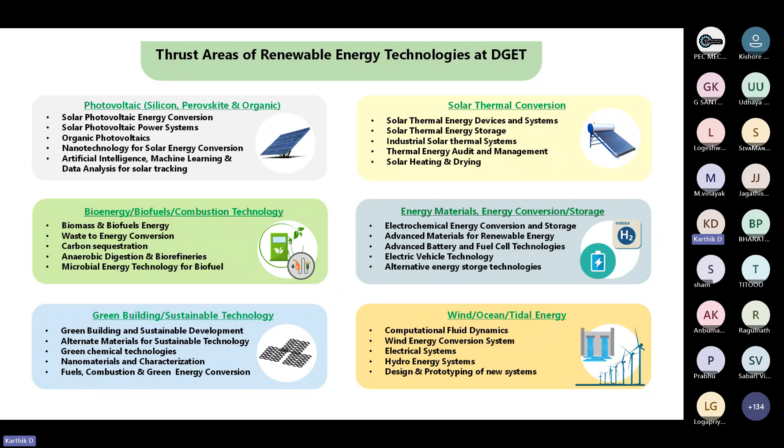So apart from that, now we are going to start a B.Tech program recently because of NEP. Everyone has to be focused on NEP-based programs. We are starting newly from this August B.Tech Energy Science and Technology. So that is of our department.

So now we have to go with the drone design and analysis. Why do we have to design the drone? What is the importance of designing drones? What are the applications? Any of you can give your opinion. Otherwise, I will just move forward.

In recent days, the importance of drone design has significantly increased. From toy to domestic applications, or for any events, drones are playing a highly vital role in shooting video and multiple things. And in Dubai and some other places, they started utilizing it for logistics management, carrying products from one part to another.

So recently, some one or two years back, our DRDO called for a project. That is about the development of drones having a high payload capacity. So what is high payload? Anyone? The payload basically depends upon the load carrying capacity of the particular drone design.

So it may have to carry food supply or logistics. Other than that, it can be useful as a spy camera. Additionally, it can carry weapons. So multiple usage, and it must be capable of carrying multiple loads and handling weather conditions. When you go to certain heights and certain climatic conditions, it has to withstand the climatic phenomena. Mostly we are traveling against the flow.

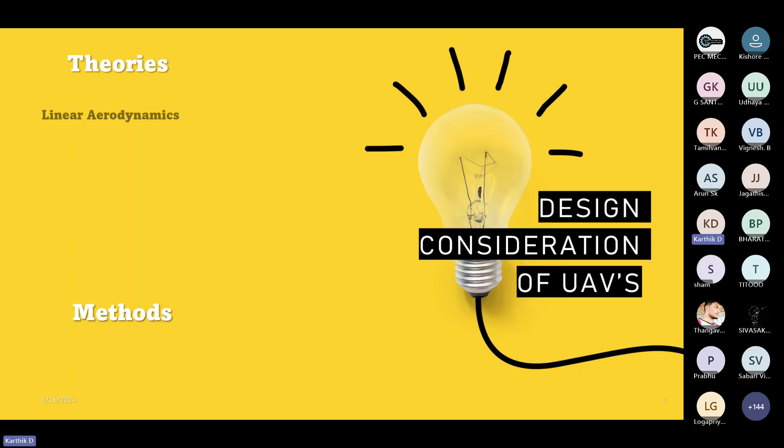So with respect to the end user, we will design a particular component or any product. So now we have theories and methods. So what are the theories and methods? When you design any drone, you have to think about linear aerodynamics, steady aerodynamics, aircraft trim, sustained turn, vortex lattice method, drag component buildup method, and computational fluid dynamics, CFD, and turbulence in CFD.

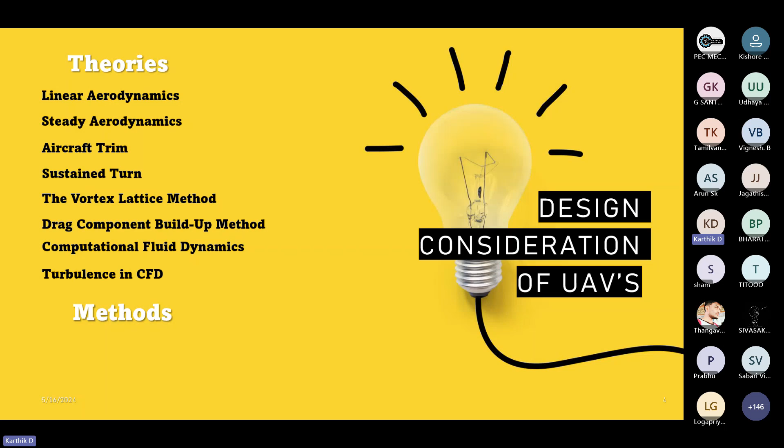Okay. So now when we go for methods, what will be there? There is a vortex lattice model or method. Okay, it will be like a model or method. Then computational fluid dynamics modeling and analysis. So why do we have to do this?

Earlier we utilized an experimental model, a prototype developed, then analyzed it in different wind tunnels. In wind tunnels, we focus on different aerodynamic profiles. It takes a lot of time, and you have to create multiple prototypes. If any particular dimension or anything has to be changed, we have to do it again and analyze it again.

So that is why the computational aspect is more prominent in recent years. It will be cost effective. It will be process effective. Finally you will get to the product. The only thing is the time consumption, compared to manufacturing a product and testing it. You can do it at the computational stage, testing and analysis using different software.

As mechanical engineers, we know there are multiple software packages for designing a component: SolidWorks, Creo, CATIA, or multiple three-dimensional softwares. Then we assemble the components together and give it to ANSYS for analysis, if it is commercial software. If going for open-source software, we can utilize the open-source version, different coding and everything. Python coding also nowadays, more and more coding options. So multiple options are there now.

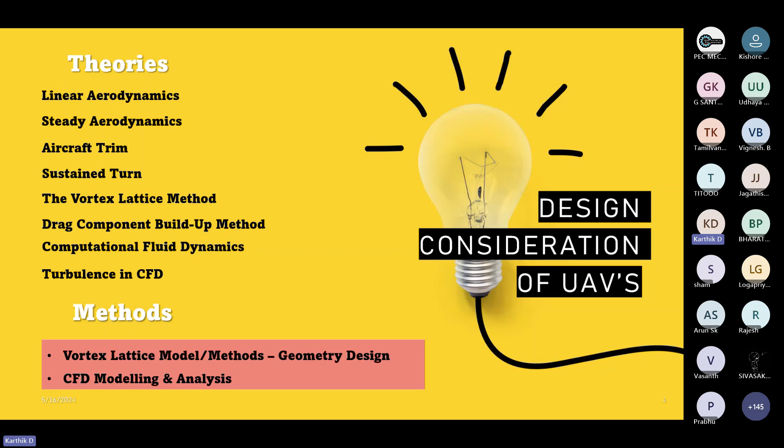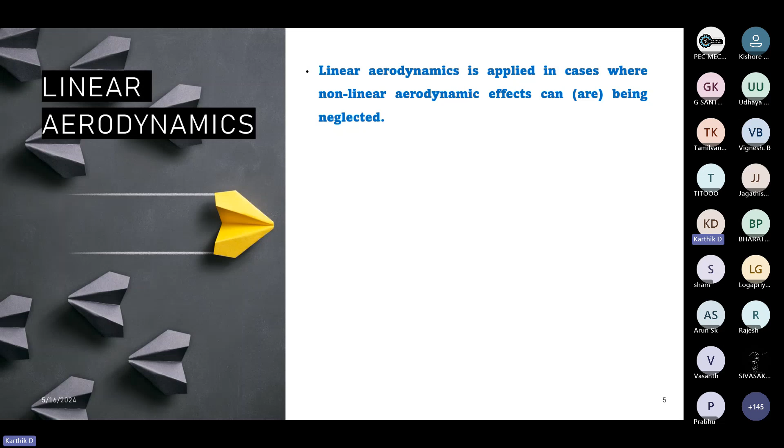So now what is linear aerodynamics? Linear aerodynamics is nothing but applying the effect. Non-linear aerodynamic effects can be neglected; there is always a non-linear effect in all the parameters. But in linear aerodynamics, we investigate small angles of attack, so there is a small change. Where does this angle of attack happen? It happens at the wings of your blade. So the wings of the blade will design the lift.

What coefficients will be there? Different coefficients, drag, lift. These coefficients define the lift and drag of your particular flow phenomena. So there will be aerodynamic forces, drag force, lift force, depending upon your angle of attack. It may be 0, it may be 15. When it goes to 45 degrees, it will stall; the flow may not pass because it is like hitting the wall of the particular zone.

So linear aerodynamics is often used as a first approximation in the earlier phase of your design. It is used for analyzing the performance and characteristics of the aircraft due to its low computational cost.

So whatever condition we consider, what it represents: when we do earlier design, we are going to design a particular component, a particular product, and you are analyzing it in a computational zone. Initially, you will analyze without the disturbance. There won't be any disturbance in that. So smoother analysis, linear algebra. When you go for mathematics, linear algebra, everything you will do.

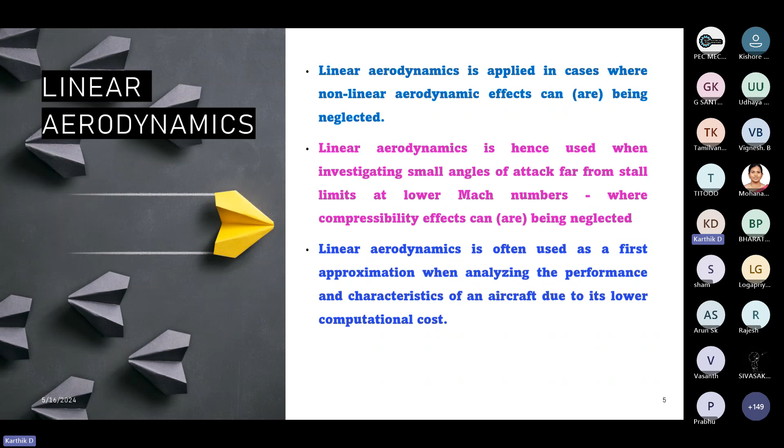So what happens? You have to understand the after effect. If there is some disturbance or some perturbation in the flow, what will happen? It may affect the overall flow dynamics. So that also has to be analyzed, the non-linear aerodynamics. So that can be done. Initially, you have to go for an initial linear, steady state aerodynamics.

Your steady state aerodynamics depends upon what? There will be a lift force because your vehicle has to travel in the air. It has to be lifted from the ground, so there has to be a lift force. Then drag force. Drag will consist of multiple drags. So what drags are there? Parasitic drag, which is called form drag, skin-friction drag, and interference drag. Then lift induced drag will be there.

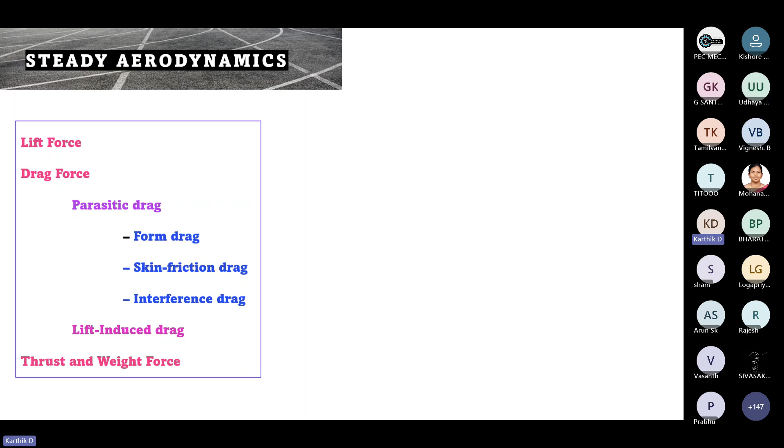Then thrust and weight forces, which are different forces, along with the different drag and lift coefficients. So what will happen? Parasite drag will attach to your body. Like the flow phenomena happening, the drag will depend upon the structure of your particular product or that aerodynamics.

We have a thrust. Thrust happens when your object is moving against the particular flow. Your lift has to lift the object. So you will change the aerofoil profile and angle of attack, and the motion will be considered, the motion of your particular aero drone, which will be supplied with respect to the input like a flow behavior. You have an engine or a gas chamber that

So what happens? It will give the initial push, but when it will be lifted, it needs an aerofoil. Aerodynamic forces have to play on that. So when you are lifting and when you are ascending, what will happen? You need the forces, which play a crucial role in your drone designs.

So what will happen? We already know there are multiple flow phenomena. How the flow phenomena behave if disturbed. So now they are probably putting a plate in a particular zone in a flow path. So

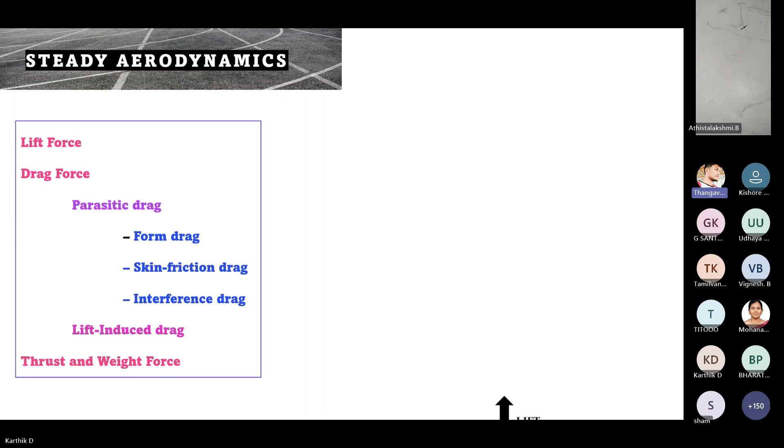Okay, now the different forces you have to consider. The main forces are lift, drag, thrust, and weight. Apart from that, the drags have a significant role in reducing the speed and the lifting capacity of any object when a fluid and structure are interacting. What drag phenomena will be there? There is parasitic drag, which consists of form drag, skin friction, and interference drag. Each will have a certain limitation.

So now what happens? Depending on the shape of the object in the flow, the form drag is very less. But when it is a different object, the form drag will have a greater percentage affecting your particular zone.

So now, trimmed aircraft. What is a trimmed aircraft? You have to design a flight by adjusting the aerodynamic forces. So we have to maintain the control. The object has to float at a particular attitude. Then it has to be controlled. How can it be controlled?

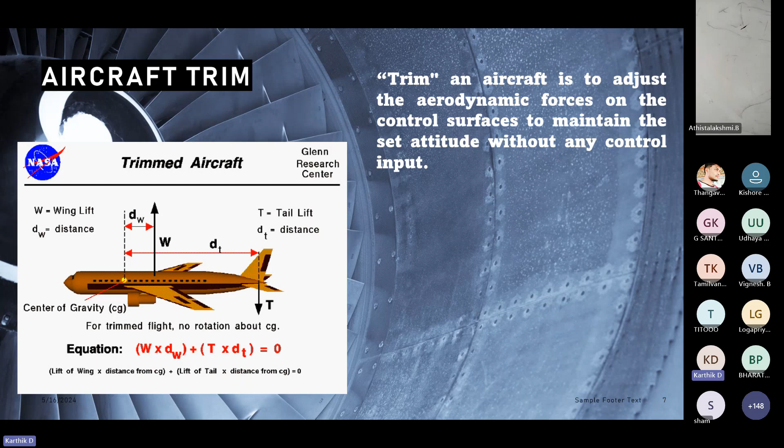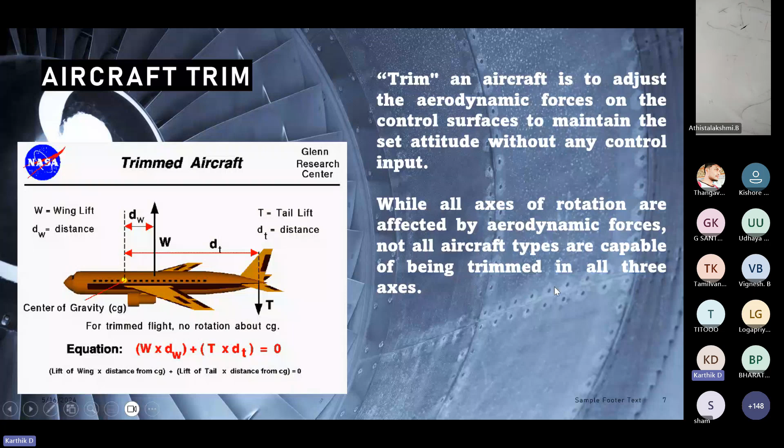You have to do weight adjustment. So everything has to be controlled; only then will the overall flow phenomena be controlled. Basically, you have a center of gravity. So your flight has to be balanced with respect to the overall weight of your particular flying object.

Okay. So now what happened? Sustained turn. The sustained turn, which we have already seen. What is there? A flight which is moving in a particular zone suddenly has to change the path. So it has to change the path without affecting that curved turn it has to take. How can it be turned?

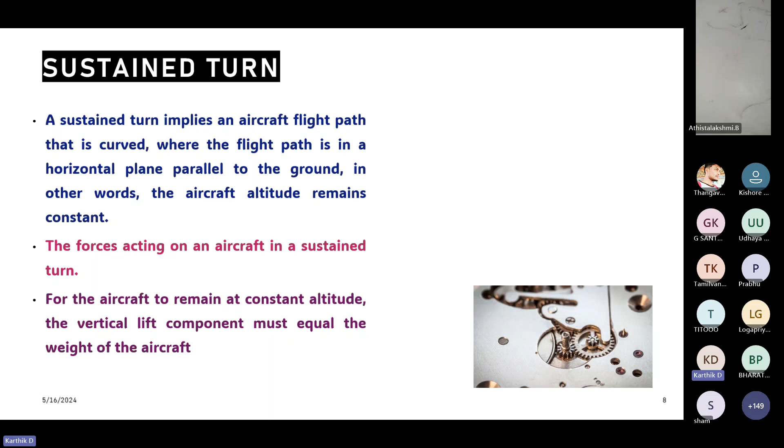Some flights will lose stability because they are interacting with the air. When there's a sudden pressure drop or change in the air pressure on the particular flight, what will happen? There will be a cause of instability phenomena. So in order to do that, only your wings have to be tilted and rotated. So these are the forces acting on the aircraft in the sustained turn. Then with respect to your weight orientation, your object has to be balanced at the particular altitude.

So now, vortex lattice method, what happened? There will be lattices. Lattices, you know, will be a box structure. Okay. You can segregate your particular zone. So what are the things there? Lattice method. It will deal with the kinematics of fluid. Okay, the continuity equation you already know. The basic continuity flow equation you have to understand.

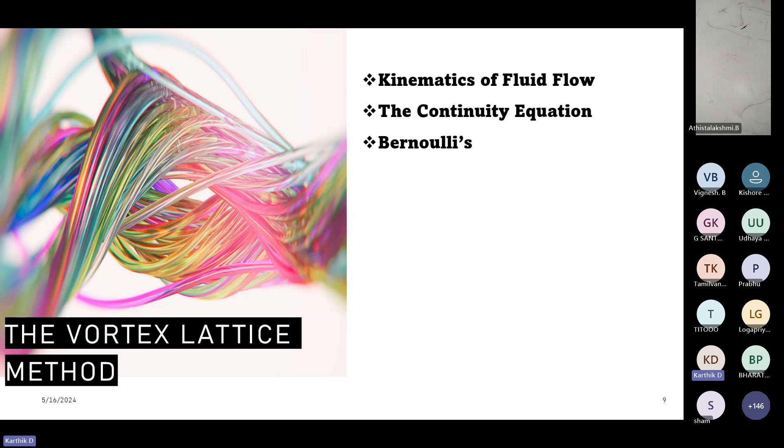Then Bernoulli's potential flow theory, Helmholtz theorem, and Kutta-Joukowski theory, and boundary condition and Biot-Savart law and horseshoe vortex. Horseshoe vortex, you may know. Actually, vortices will be generated as P type, S type, multiple type, and this horseshoe type, which we have seen in that earlier version. Okay, I'll show where it will be. The horseshoe formation of your particular vortex generation.

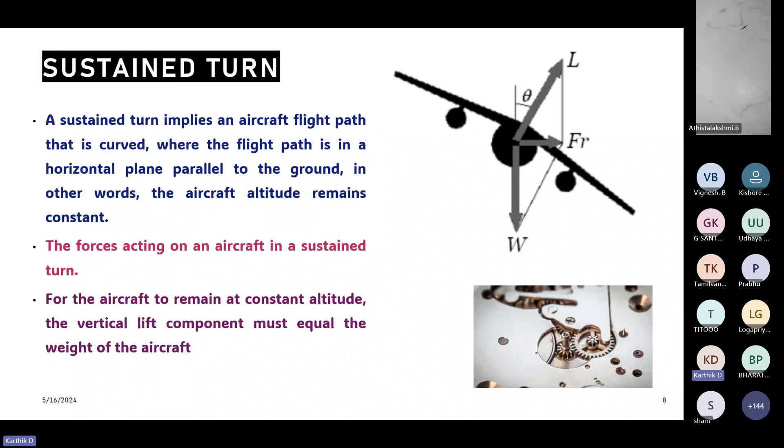Interaction between the vortices will lead to creation of turbulence, more turbulence, more vortex shedding phenomena. Vortex shedding will lead to more turbulence or instability in nature. Okay, so then what will happen? We have to have a different vortex lattice method and theorem based on that particular method. So now we have to move towards the classical vortices method. Why do we have to move to a classical vortices method?

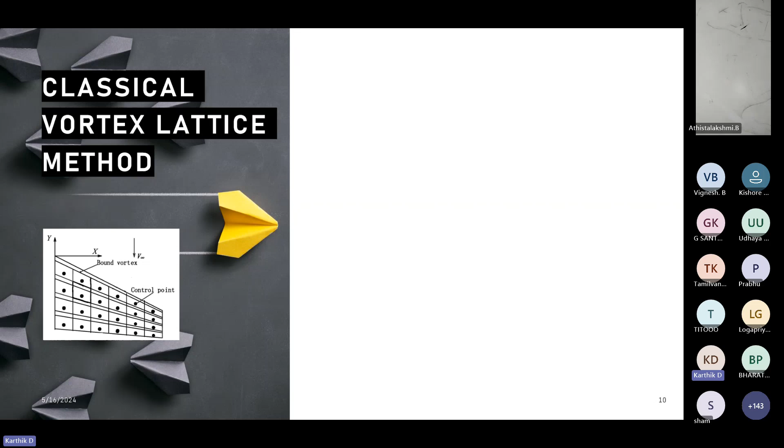Your wings are helpful for your lift and drag, and all the force coefficients are mainly focused on your drag and flutter plates and everything. So now we are understanding the flow phenomena. You have to segregate the part of your particular wings. So wings are divided into a lattice of panels, where for each section, the horseshoe in the particular zone, how it is affecting or how it is distributed on each panel. Okay, so you segregated. So how can it be done?

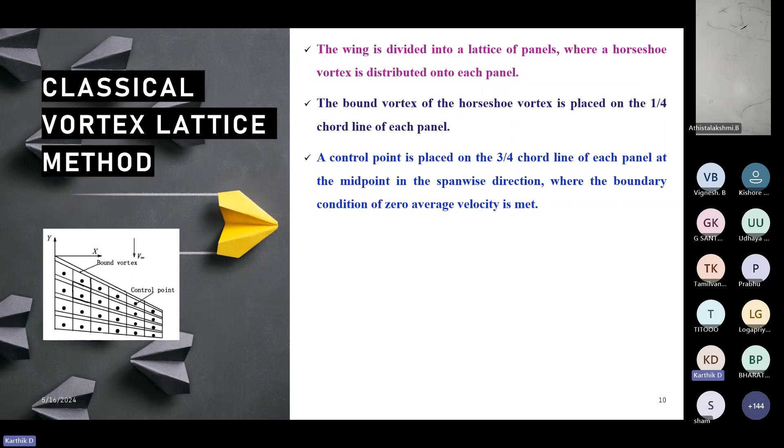So the bound vortex of the horseshoe is placed at 1/4 of the chord length. The overall length is your chord length, and on that particular line the horseshoe vortex is generated at the particular point. Then the control point. This will be your particular zone, like a finite element study you have studied. That particular cell point will be placed at 3/4 of the chord line, for each panel at the midpoint in the spanwise direction. So you have to understand the flow nature, the generation of the vortex and its impact on your main forces, your drag and lift forces.

So now, all the lift generated has to be analyzed using the Kutta-Joukowski theorem. And apart from lift, the main component in your drone design is the pulling force, that is your drag. So how can drag be identified and how does it impact your design? So where will drag be there? It will be there in your wing, tail, then fuselage, nacelles, and other miscellaneous components.

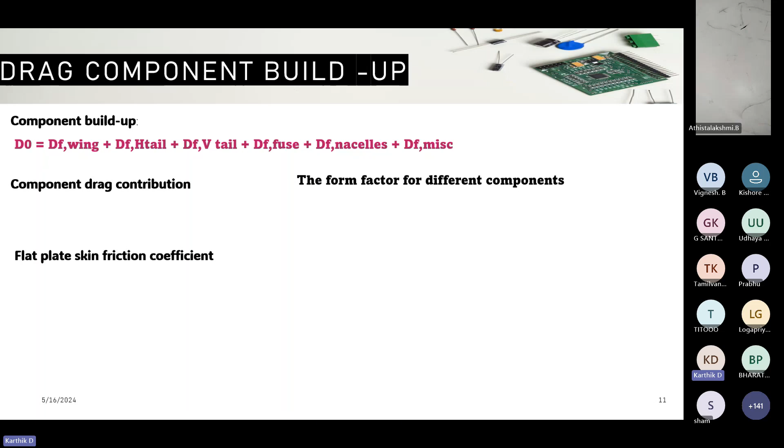So what are the component contributions for the drag? It has to be the summation of your particular components, that is a strut, and the remaining things. So the drag applied on all the components, with respect to the strut, you will identify the components of drag contribution to the particular drone design. Okay. So now what happens? Skin friction factor.

So, skin friction factor for flat plate skin friction coefficient - how it will be there under particular conditions. If instead of a flat plate we consider a circular or other aerodynamic profile, we still consider it as a flat plate. That flat plate has been defined earlier, along with the different skin friction factors and your factors mentioned in the earlier version, with some charts.

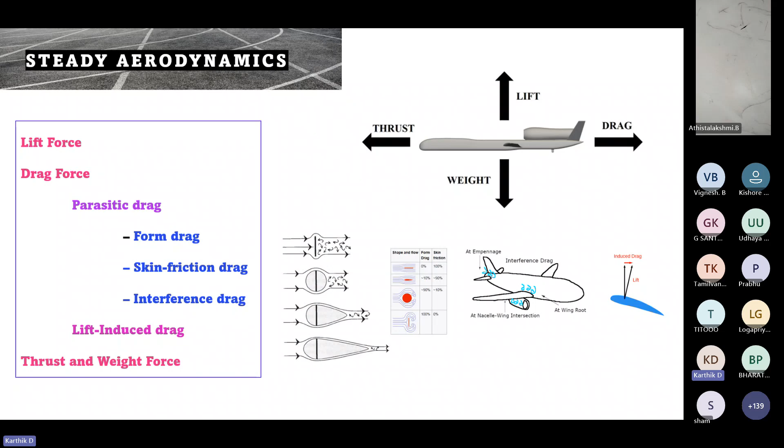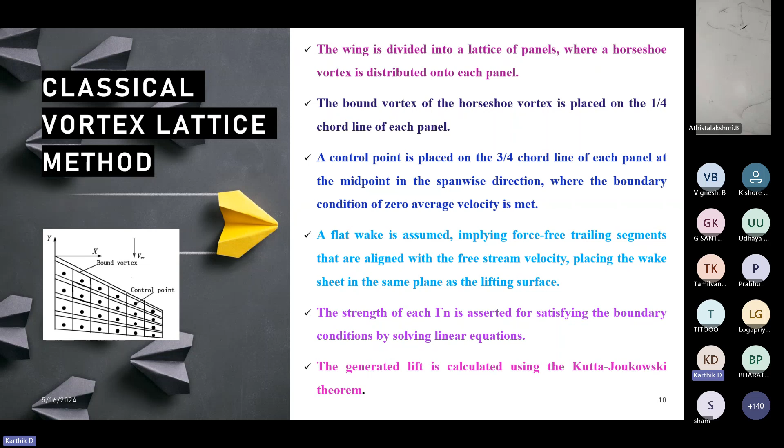So predefined factor for different components and different objects. With respect to different structures, skin friction factors will be modified from the predefined value. So for a circular object, there's a form factor for the different components - you have to understand what is happening in your form factor at the wing, tail, strut, pylon, and fuselage.

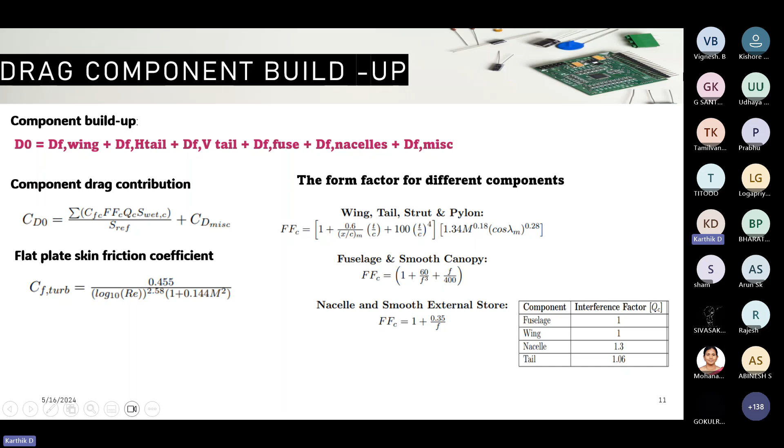So here we have seen skin friction factor and everything, then we have an interference factor. For different fuselage - your storage, fuel tank - that interference factor is 1, and one for wing, 1.3 for nacelle. For different structures, there is a different interference factor that can be used for calculation.

So these are the theoretical calculations - we have spoken about theoretical calculation. What is the significance when we are moving towards applying the computational aspect for the development of design of an aerodynamic vehicle, like an aerial vehicle or automobiles, which has to go against the nature of aerodynamic forces?

The computational fluid dynamics is based upon the physics of fluid conservation - energy transfer, mass transfer, multiple things. Your flow conservation equation will be defined. Then you have the Navier-Stokes equation, the Reynolds Averaged Navier-Stokes equation, and multiple other things. So you have to put it in discretized form.

What is a discretized form? You have to discretize the form, whether it is a finite volume method, a finite difference method, or whether it has to be solved with a finite element method. Then you have to make grids and everything - computationally you may have already done grid independent study.

Why do we have to do a grid independent study? We have to do grid independence because our designed object can be divided into multiple zones, multiple grids. It has to provide the same result without affecting the nature of the solution, though there may be a minor variation - that has to be grid independent.

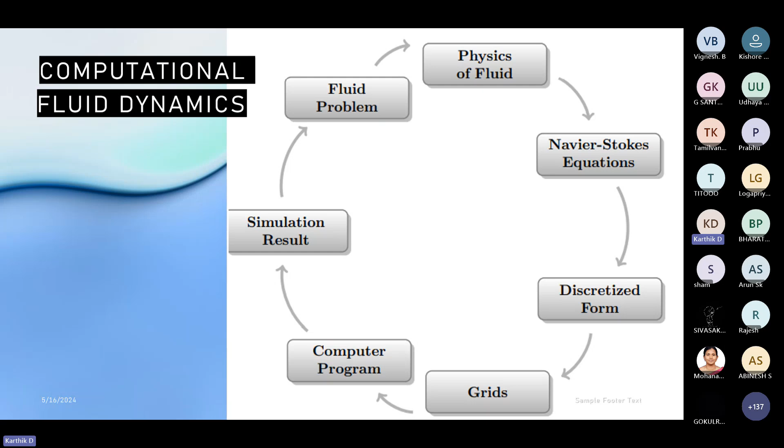Then you will solve using a commercial version or a program you have developed - it may be an open source program for the particular condition. Then you will get a particular result out of it. Normally there is turbulence, so to follow the turbulence - because the fluid structure interaction at different flow rates causes turbulent flow nature, perturbance development.

So what are the different methods? There is Direct Numerical Simulation, DNS. Scale Resolving Simulation, SRS. And Reynolds Averaged Navier-Stokes simulation. Now what happens in scaled simulation?

There are multiple scales. It identifies the eddy formulation - multiple eddy formulations, or three-dimensional aspects of the flow phenomena with respect to each. So multiple in-between subscales will be formed - subscale phenomena added in multiple scenarios to support the thing. So what are the things that will be there?

Large eddy simulation, and there is a hybrid RANS and LES simulation - we have the Reynolds Averaged Navier-Stokes equation along with your hybrid. LES and RANS combine to solve the detached eddy simulation - there is large eddy simulation and detached eddy simulation, then scale adaptive simulation and partially averaged Navier-Stokes simulation.

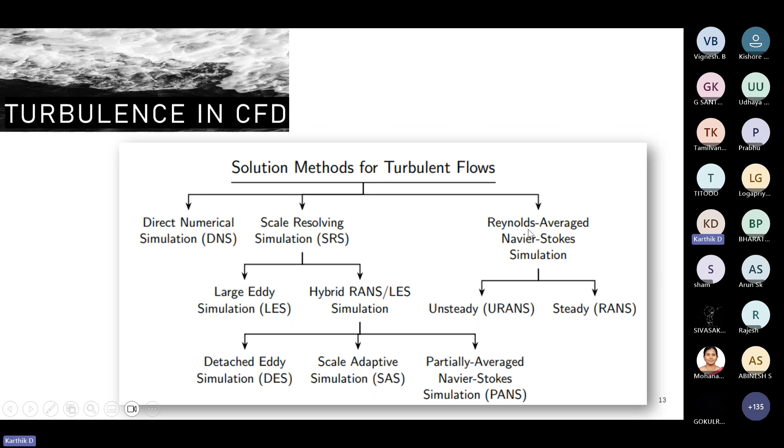So normally when we have a solving, we will use the RANS equation, used in multiple conditions. So when you go for a RANS model, what things will be there? You have to see the eddy viscosity model, and the Reynolds stress model.

So what are the things when you go for eddy viscosity model? That is an equation based model - Baldwin-Lomax model, one equation model, or two equation model like k epsilon or k omega. The Reynolds stress model has 7 equations. Depending on these equations, we solve the problem and get multiple solutions, multiple conditions to satisfy.

So now what happened? Your k epsilon model will be standard k epsilon, RANS, RNG, realizable k epsilon models are there. Then k omega model, that is a two equation model - standard k omega and generalized k omega with SST models.

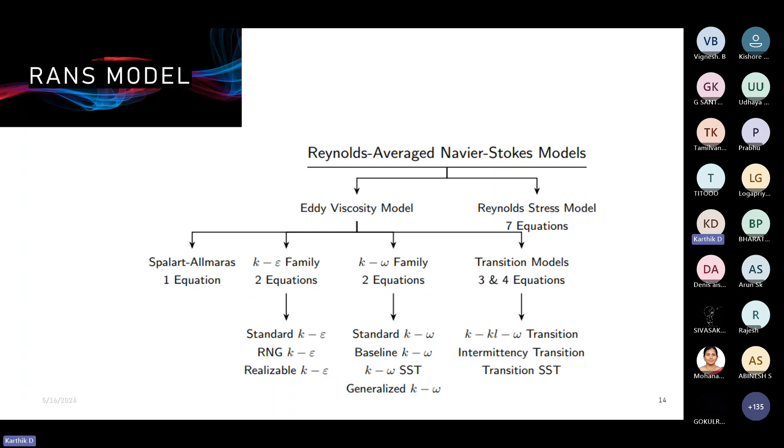Then we have 7 equation models - there is a transition model of 3 and 4 equation k omega, then epsilon and omega combined together as intermittency transition model, and SST shear stress transport phenomena. The transportive nature of the flow phenomena has to be understood.

We have multiple software and solutions for sustainable development of drone designs. So now what happened? We have VLM - vortex lattice method. We segregate the wings into particular lattices and identify the impact of the particular vortex generated in the zonal conditions.

Now what happened? We have to think about what things we have to consider. When anyone is going to design any component, what will be the basic phenomena? You have a mechanical engineer - we design the component, we design the particular aerodynamic solution. So in ANSYS, how will we do it? We will design the aerofoil, a particular aerofoil, or the whole object.

So then what will happen? We will make a computational domain with boundaries, whether it has to be a medium, you set up the flow medium, everything. Then you make a grid formulation - your discretization, then formulation of your grid, whether fine grid or multiple grids. Then you go to your solution, solve accordingly, and get the major parameters.

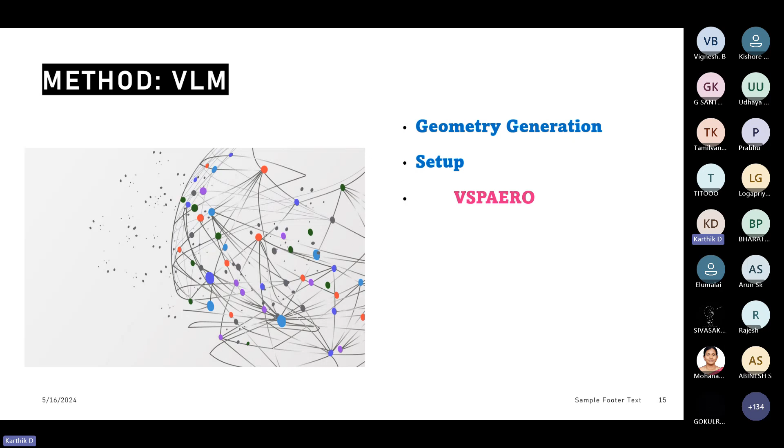So now what happened here? Instead of using ANSYS software, there is a software called VSP Aero. NASA and foreign countries have been utilizing this for drone development. This VSP Aero, you can set up similar to ANSYS, but here we can identify multiple parameters.

So what are the things? We have to generate a geometry, which can be generated through any two-dimensional or three-dimensional software. Depending on how you want to apply it, whether two-dimensional or three-dimensional, then you put up the setup. We have trim analysis there.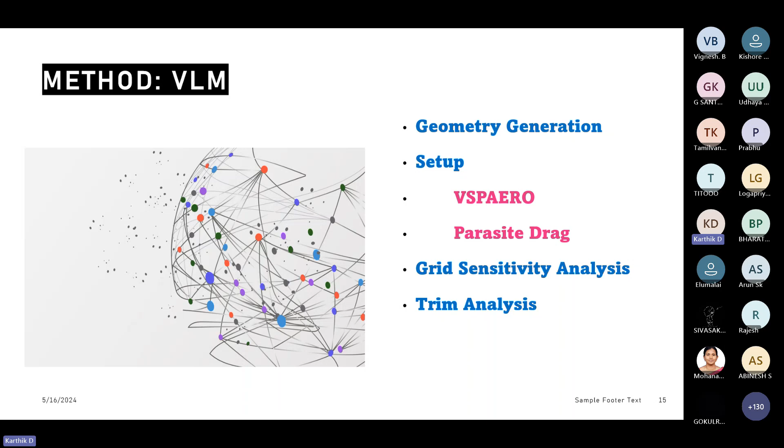I will show trim analysis exactly with a figure. So I have designed a component - this is my aerofoil or aero drone. So design specification created the VSP model. So what is this thing?

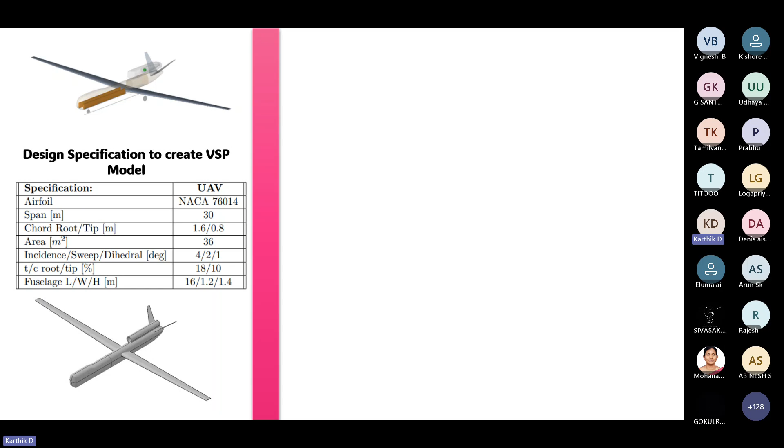This aerofoil blade profile is made of NACA 76014, span length of 30 meters, chord root tip of 1.6 to 0.8, and area of 36. Then incidence of sweep 4 to 1 - that sweep dihedral, take everything, and ratio of T/C ratio, then fuselage that is 16 and everything. Multiple conditions, multiple parameters you have to keep, multiple components will be there. Everything you have to design to specification - you have designed this, your part, and design the component.

So now what happened? There is a software VSPAERO, now you have to go there. You have to give the method - when you go for which method we are going to use, that is the vortex lattice method. So we have to go for different wings, area, everything.

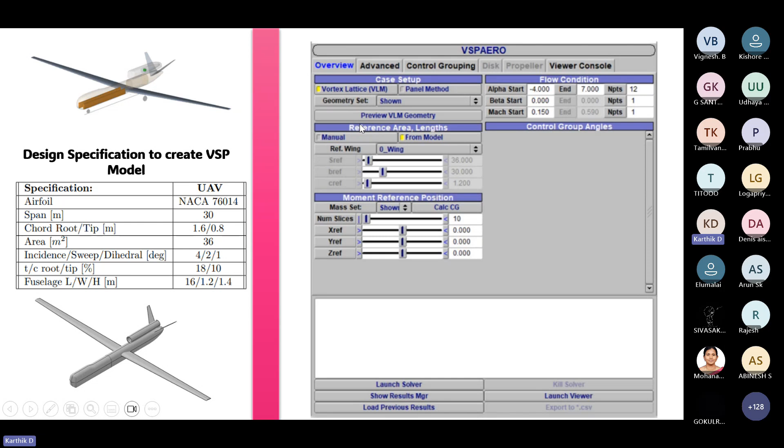We controlled everything, so now we have to define the drag coefficient on the particular wing. We may have wings, we may have stabilizers, because your aeroplane will have a normal stabilizer. If it malfunctions, your flight won't have proper stability, it will go floating like a boat in turbulent water.

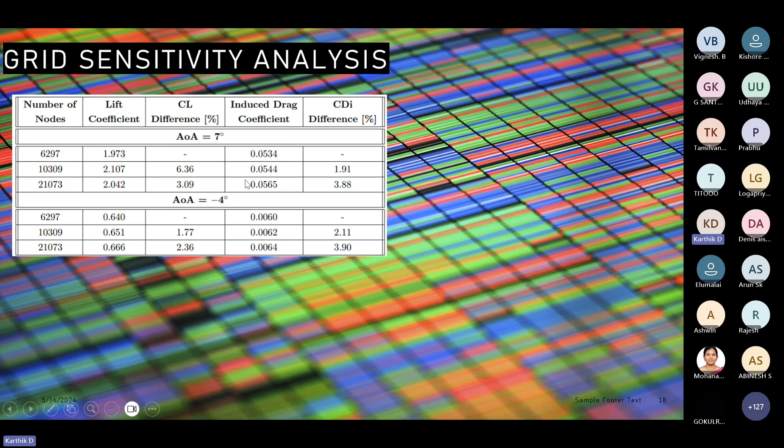So now you generated your grid on the particular structures. So now what happened - you have to trim. What is the trim analysis? Any one of you?

Why do we have to do trim analysis? Your object, in any design, may have a misalignment - we have to understand any other particular component or misalignment. You have to understand whether your object is properly designed and may not have any effect on the flow nature, considering flutters and wings.

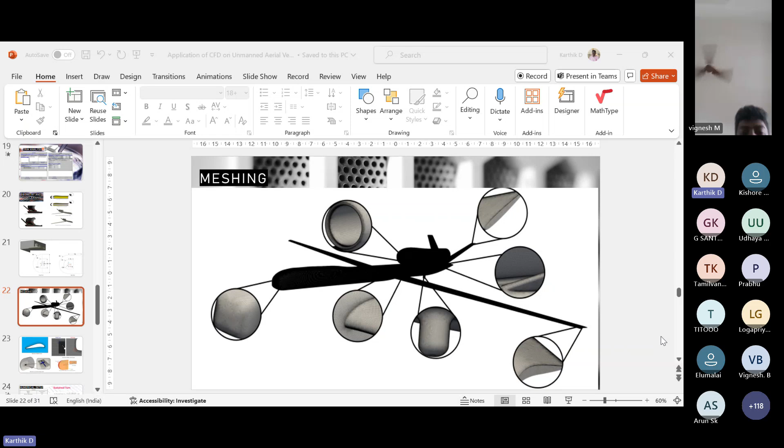Or not? Tangavil sir. Sir, yes sir, you can proceed. Actually some of your friends removed me from that meeting, I don't know who did that. Sorry for the inconvenience sir. Change the meeting option sir. Okay no issue, thank you so much. Thank you sir, yes sir. I don't know where I have been there, which part? Any one of you, whether I have been.

Actually, I'm in lecture. Okay, I will call you after 11:30.

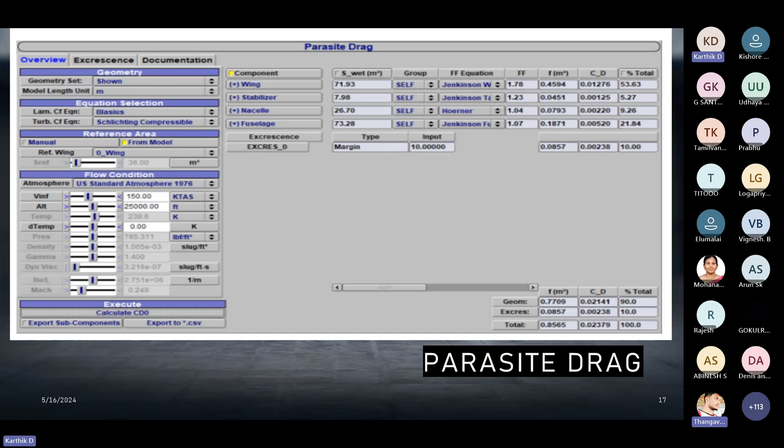Okay, no issue. So what will happen? When you have to design everything in order to have a continuity of your simulation, because your grid, once you discretize and you have a grid formulation, that grid is important to solve the failure and other things, the flow nature, when the flow has been distributed or significantly impacted on your particular structure.

Okay. So now your structure has to be analyzed properly, whether it is completely connected continuously. If there is any gap or any hole, as a mechanical engineer, we know that forces applied on any object, the stress-strain, will be more on the weaker zone. That weaker zone may be the holes. If you have a flat plate, the stress, instead of the corner, will go to your holes, then to the particular corner, more stress concentration.

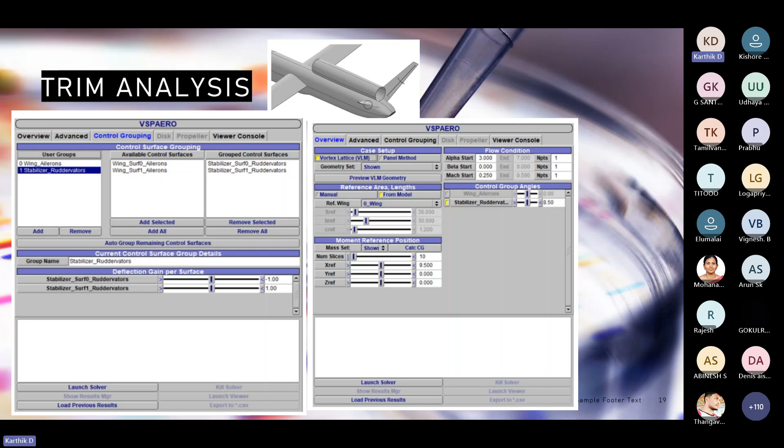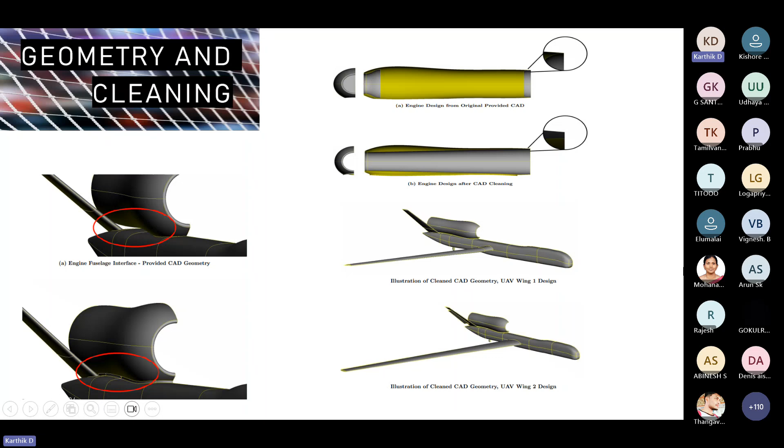Like that, you have to design the object and the parameters in an efficient manner, in order to avoid unnecessary discontinuity. Earlier it may be a flat. Then you can design the component with respect to attachment to the fuselage setup, and you do the continuation of the particular product. When we designed everything, yes, sir?

Sir, just 1 minute, sir. I'll just change the meeting options. 1 minute, sir, please. Okay. Sir, you can please proceed, sir. Thank you. Yes.

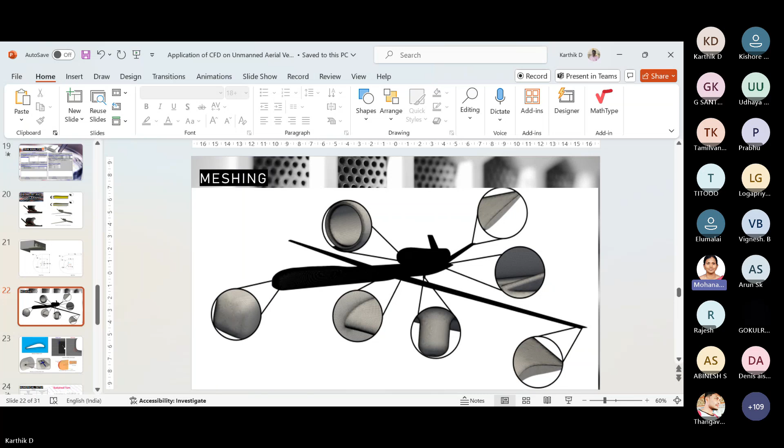Okay. I hope we have designed all the objects and we have a formulation of your mesh. Okay, we have a clear mesh. Now, before doing this, we understand your component is neat, the geometry has been very neatly derived, and you have confidence that your design will be best.

Now half an hour. Another. Okay.

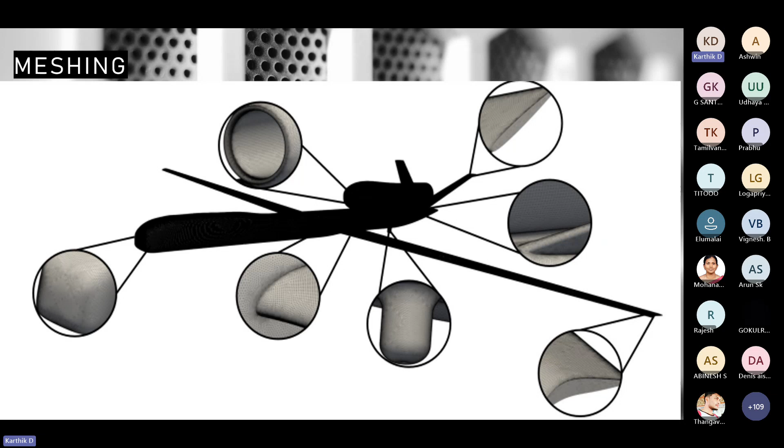What will happen? So now we need a domain, because in order to understand the flow phenomena and the effect on your component, we need to identify the boundary conditions. What are the boundary conditions we have to fix? Those boundary conditions have to be fixed properly. Once you define your component is okay, you put the component inside your domain.

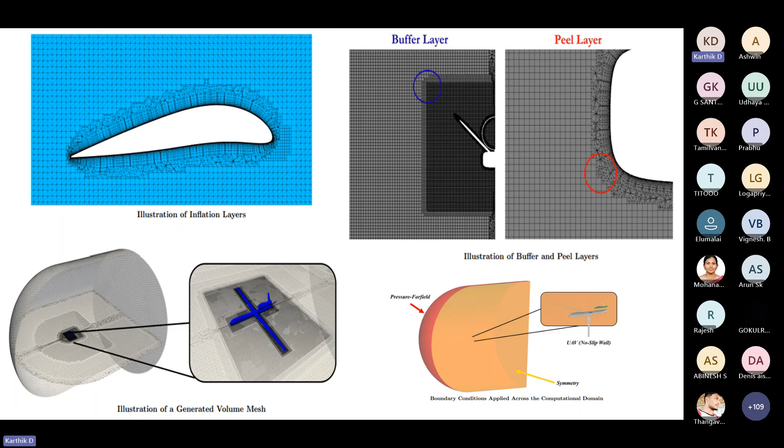You have to formulate, identify and set up the boundary and all other zones. When you generate different cell zones or cell conditions near the component and at different regions, we need to identify where the flow separation is happening in the component, whether at the tail region, or where exactly the vortex is, in order to identify the generated vortex phenomena at the particular point.

It is the same thing as when you utilized your ANSYS software. To maintain the sustained turn, we have to see the maximum load factor. Then similarly for your stabilizer. It basically depends on different parameters; approximately it will be 1.127, or the maximum load factor will be 1.40. Then there is a pressure-based solver, and what type of model you are going to use: Spalart-Allmaras, k-epsilon, k-omega model.

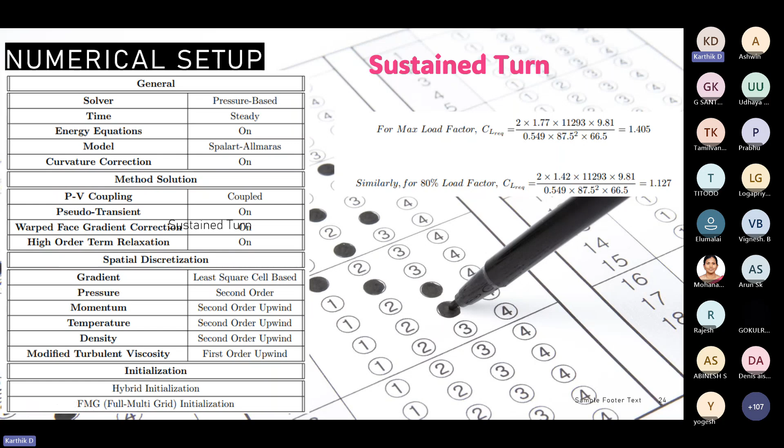It is similar to what you have done in ANSYS and other software, hybrid initialization. Then finally you will solve the particular problem. So what are the different things that will be there?

We have a fuselage, that engine outlet. What will happen? There is a different flow phenomena or change of phenomena. High pressure contribution near the boundary you can see. So once you understand what is the momentum and continuous transfer of flow, it is a conservation of energy equation. Overall energy transfer and mass transfer, everything you will understand.

At a different point we have to identify for different meshing condition what is the value we get and what are the effective solutions out of it. So these are the main regions when you have an application of CFD. When more concentration of stress at a particular point, what will be there? If in the fuselage region more stresses are concentrated at different points, it will lead to the failure of the component. Then what will happen?

If your aerofoil is there, if there is an accumulation of more drag, more drag phenomena, it will show. So those edges will be leading to that accumulation of forces at the particular edge. Here you can see a smooth flow or equal distribution of pressure, force or velocity on the particular component. Then you can see there is a variation on the nose zone, different conditions.

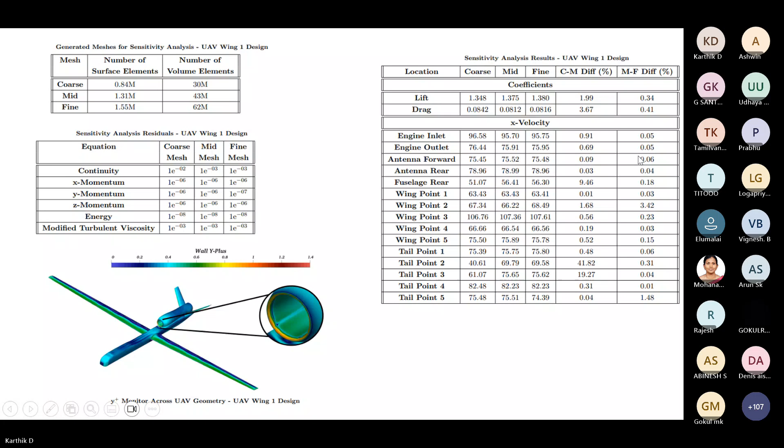Sir, sorry for the inconvenience, sir.

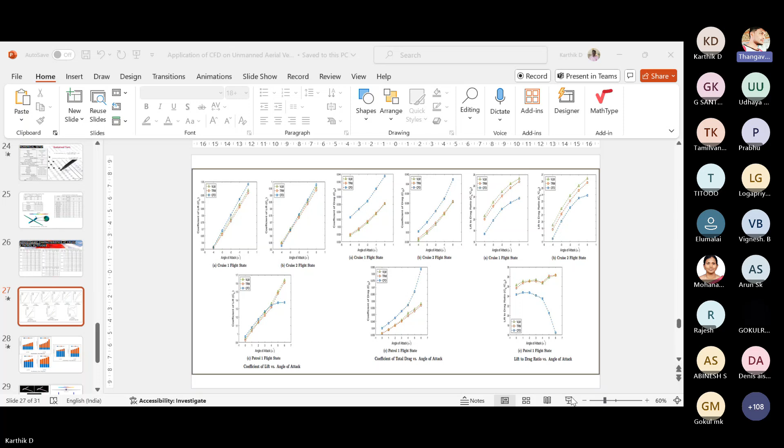I think someone doesn't want to listen to the lecture. I don't know who is doing this. They are doing a great job, because I'm not muting or moving away from this lecture. Yes, sir. I know, sir. We are trying to change the settings, sir, but we can't. Sorry for that, sir. You can proceed now, sir. Those interested can contact me later also.

Okay, no issue. This is for different flying conditions, different patrol conditions, different operating conditions and different angles of attack. Negative, positive, it has to be understood, because of the stability of the flow phenomena and the sustained turn it has to withstand after different analyses.

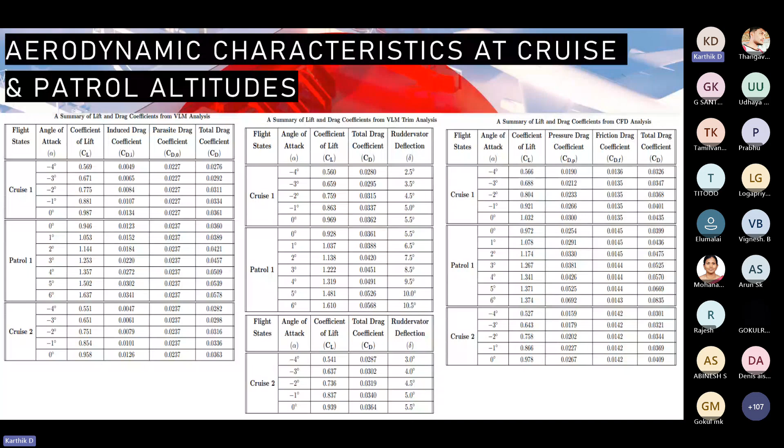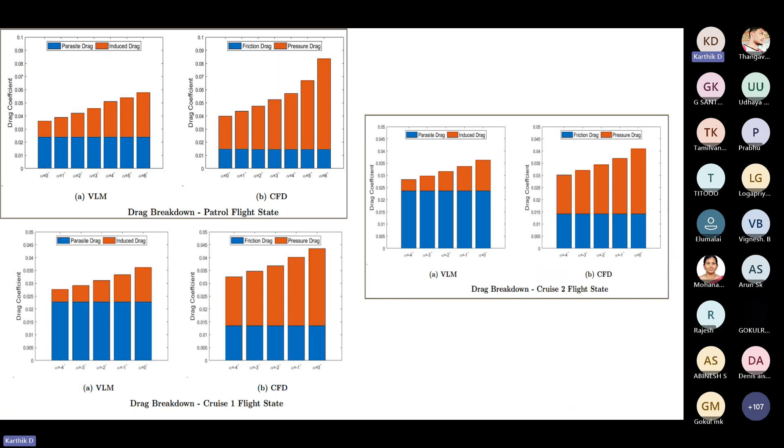Along with this, you can do similar analysis with your commercial version of ANSYS software. You can analyze the solution out of it, so you will have a better solution for how it can be managed and a better design. So these are some of the results: how the drag, induced drag, is influenced in your particular component. So now what happened? What is this?

When you use it for spy application, the defense corridor, it may not need a multiple weight loading capacity. But when it is a multi-purpose drone design, it has to carry, it has to survey, it has to do all the aspects. So then you have to design for multiple zonal conditions, climatic conditions, variation. Climate will involve flow nature, velocity, different flow phenomena. It can be temperature variance, pressure variance, because it has to travel different altitudes and different regions.

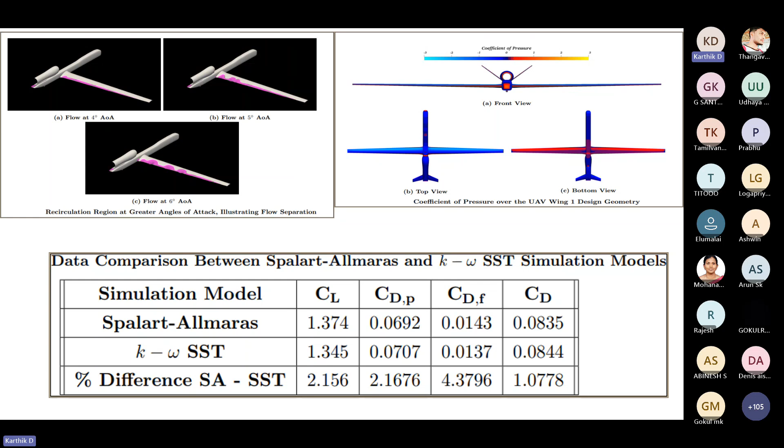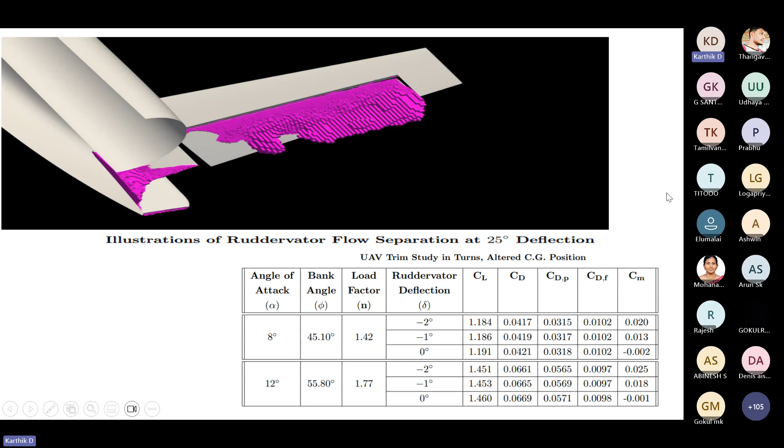Apart from that, you have to design the overall material characteristics also, because your flow nature has to be more smooth. When it is not smooth, it will create more turbulence in the particular domain. So these are the things which we have to design. This is the ruddervator. What is a ruddervator? It will help you with different flow separation through its deflection. It is useful for the lift and drag part. Different angles you can change. You may have seen it in an aeroplane. So these are the basic things you have to consider in your initial drone design and analysis.